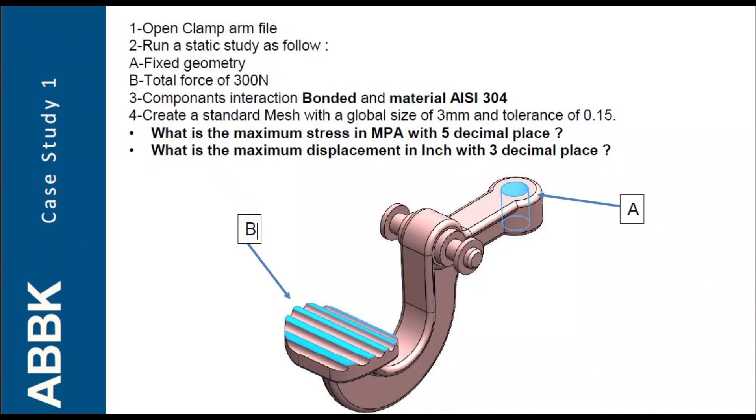Hello everyone! In this tutorial, I'm gonna show you how to set up and run a linear static simulation on a clamp arm. A clamp arm is a component of a bench vise mechanism, and as you can see in this picture right here, it is responsible for securing the vise to the working bench. This part experiences significant forces during tightening, that's why we need to ensure that it holds up under pressure.

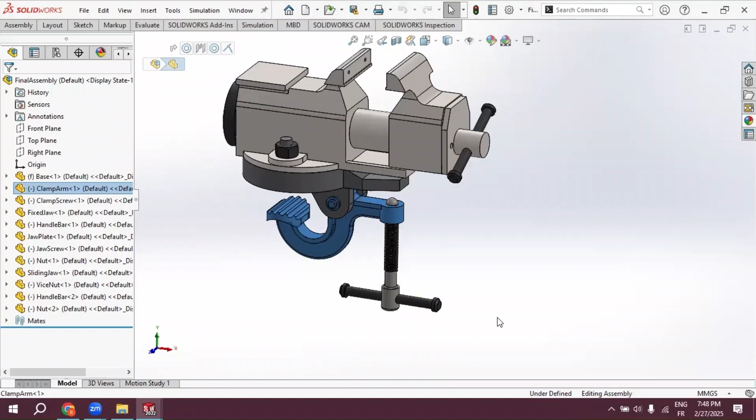Let's start by creating a new study. Click on Simulation, then New Study. Static is selected by default, so just click on OK.

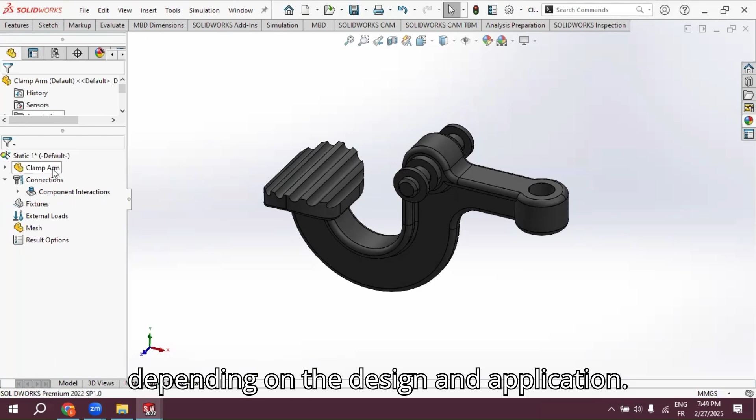Now, the first step is applying the material. Typically, the clamp arm is made of cast iron or steel, depending on the design and application. Here we're gonna choose steel. Right-click on clamp arm, then select Apply Material to All Body. I'm gonna choose stainless steel AISI 304. Just type 304, select it, click on Apply, then Close.

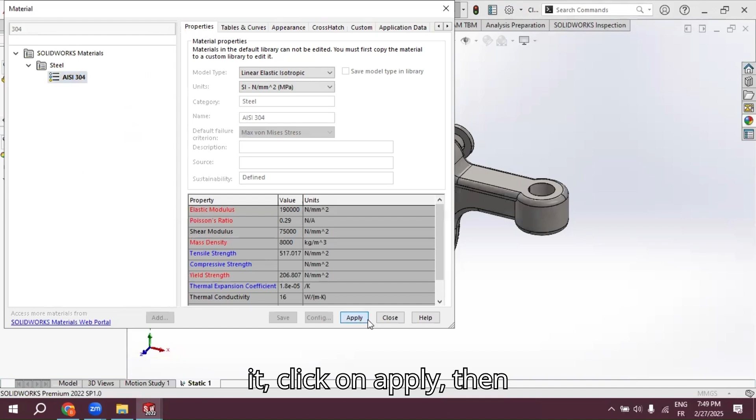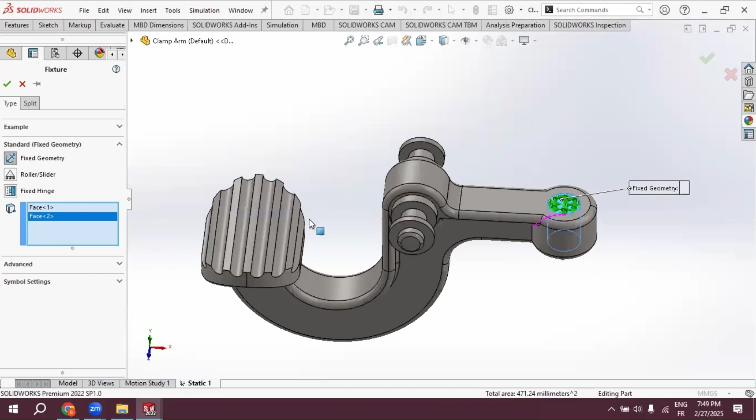Alright, now that the material is applied to our part, we need to fix it. Right-click on Fixtures, select Fixed Geometry, and let's select this face and this face. Now click on OK. If you go back to take a look at the whole mechanism, you will see that this is where the screw is meant to be.

That's why it's fixed. Alright, now we need to simulate the forces coming from the workbench or whatever surface we're fixing the vise on. Because as we all know, Newton's third law says that for every action there is an equal and opposite reaction. So our action here is the force that we applied by tightening the clamp, and the reaction is the force that the bench pushes back with.

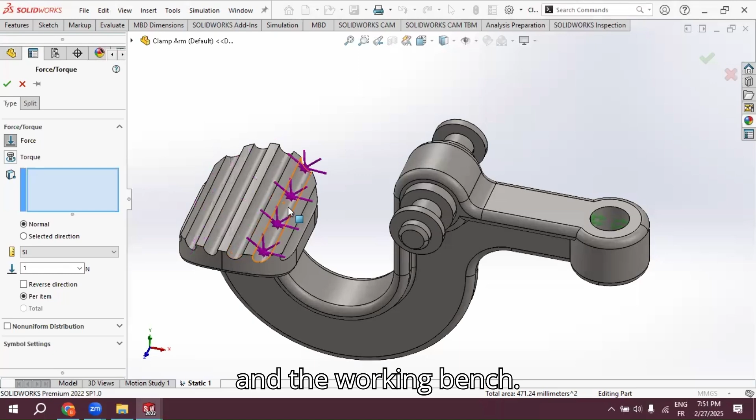To simulate this force, right-click on External Loads and select Force. Now, let's select the contact surfaces between the clamp and the working bench. And let's set our force to 300 Newton. Now click on OK. Now our next step is to mesh our part.

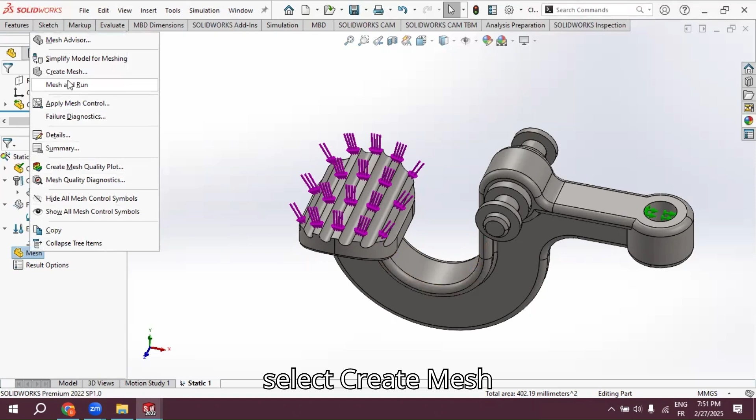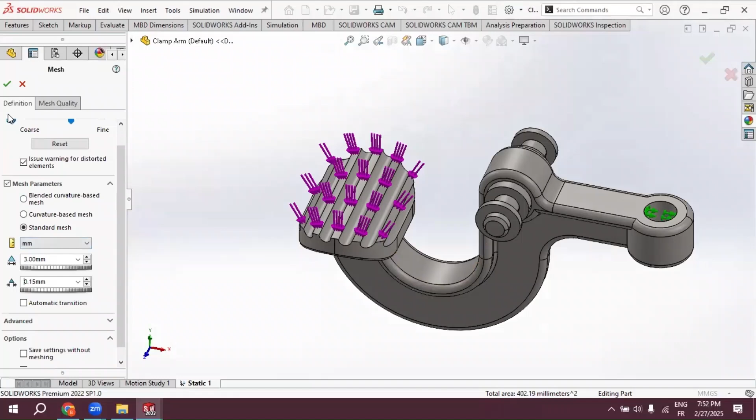Right-click on Mesh, select Create Mesh, and click on this little arrow to expand the mesh parameters. For this study, we're going to choose a standard mesh with a global size of 3 mm and a tolerance of 0.15. Click on OK.

Now that our part is fully meshed, we can run our study. Click on Simulation and run this study.

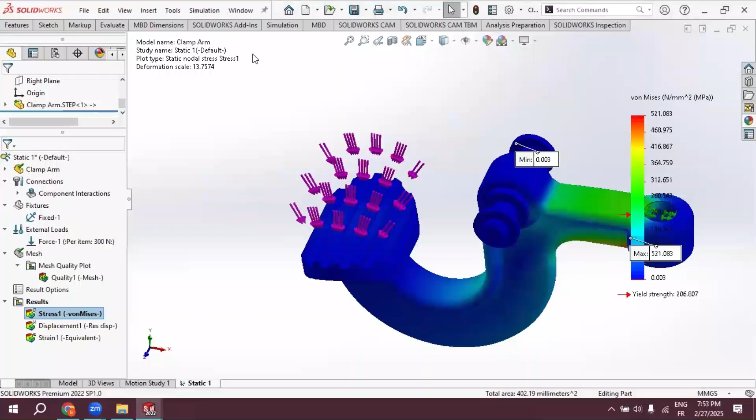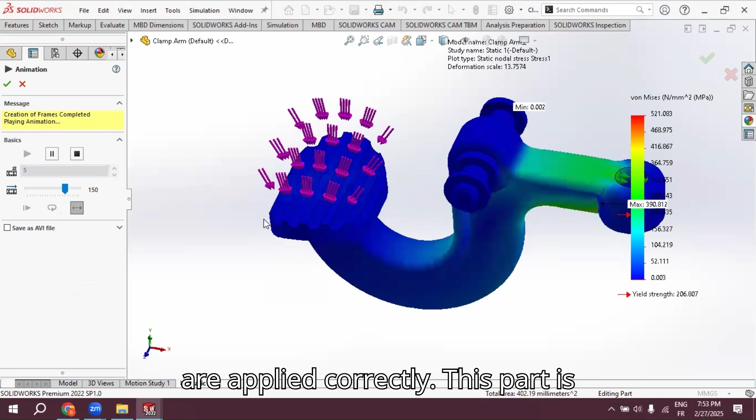And here is our result that we can animate by clicking on Stress. Right-click on Stress, select Animate, and here we go. Watching the animation can be really useful to help you verify that the fixtures and loads are applied correctly. If the part deforms differently than expected, you might need to go back and double-check the fixtures and loads to make sure they are applied correctly. This part is deforming as expected, so we're good.

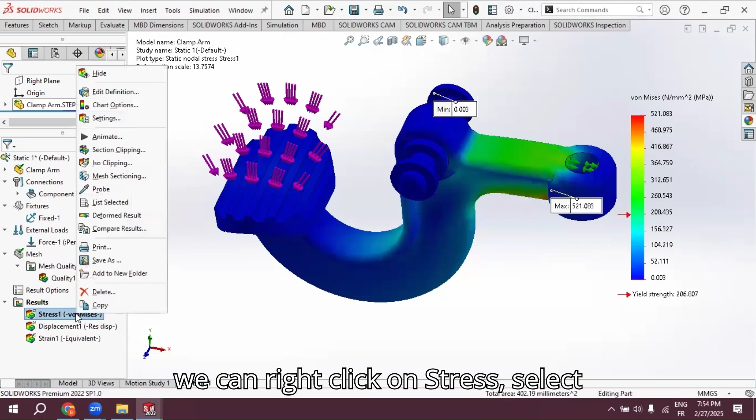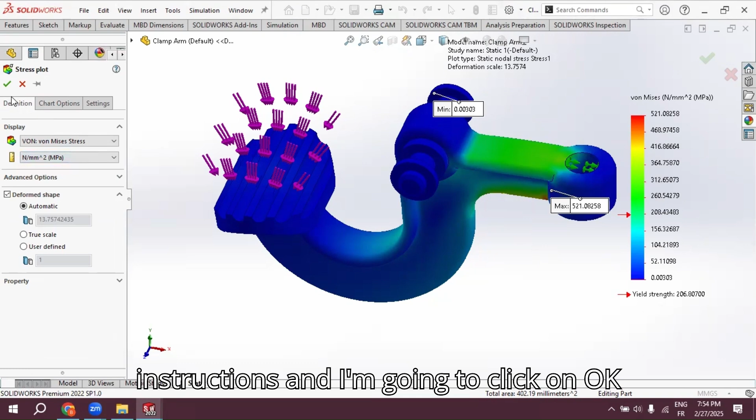In the result plot, we can see that the unit is megapascal with 3 decimal places, while the questions require that the maximum stress is in megapascal with 5 decimal places. To adjust this, we can right-click on Stress, select Chart Options. Now scroll down a bit and set this value to 5. If you need to change the unit, you can click on Definition, and here you can select the desired unit. I'm gonna leave it megapascals as it says in the instructions, and I'm gonna click on OK. And here is our maximum stress in megapascals with 5 decimal places.

The same principle applies to the second question. Double-click on displacement to activate it, then right-click on it and select Edit Definition. Here we're gonna change the unit to inches, and let's change the decimal precision by clicking on chart options, scroll down a bit, and make sure the value here is 3. Now click on OK. And there we go. Here we can see the maximum displacement in inches with 3 decimal places.

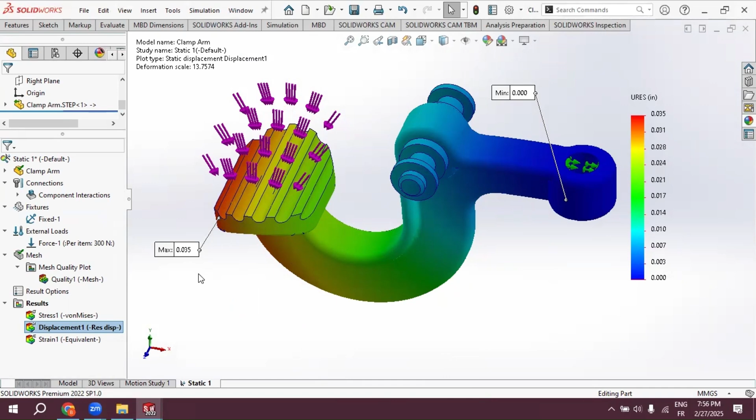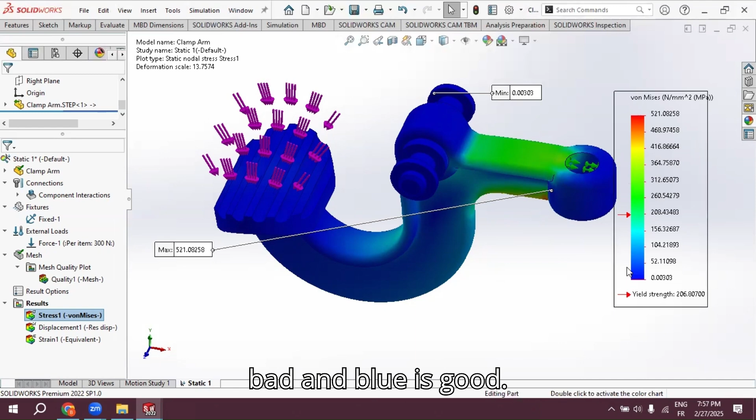Now let's go back to the stress plot to interpret our results further. On the right, you can see a color-coded plot showing the maximum and minimum stress using the von Mises criteria. And a common misconception for new simulation users is that red is bad and blue is good. Well, that can be correct in certain tests, but the color code simply represents the maximum and minimum stress that the part is experiencing under the applied load.

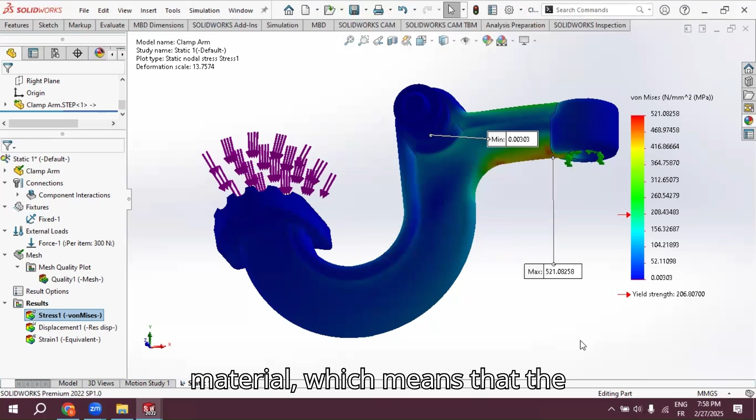To interpret the results in a meaningful way, you must pay attention to the value in the legend. Notice at the bottom of the plot, you can see the yield strength of the material. In this case, the maximum stress is higher than the yield strength of the material, which means that the part will experience permanent deformation or even failure under the applied load. So the current design is not strong enough for the given load.

And that wraps up this tutorial.